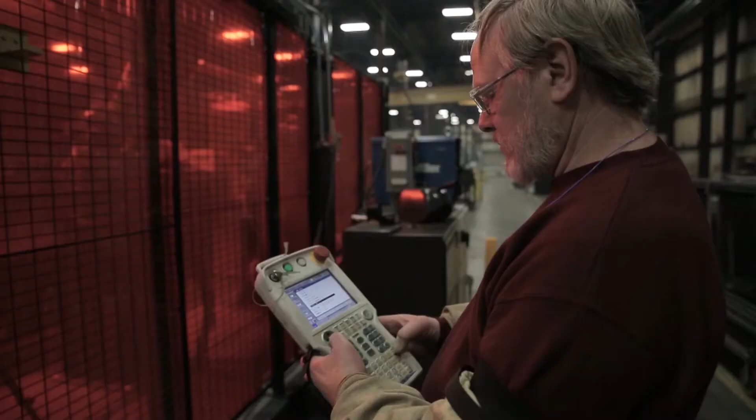It's called Spacesaver, a company with a long history of finding unique ways for people and businesses to store their stuff. It was an idea that started small, but rapidly grew to fill a global space. Spacesaver was founded in 1972, and we actually started in a barn with a 7-person team. At that time, the company was small, and we focused only on high-density mobile storage and shelving. It was about maximizing space in a given cube. Today, we've grown to a company with over 400 employees, a 300,000 square foot manufacturing facility that offers customized solutions all over the world.

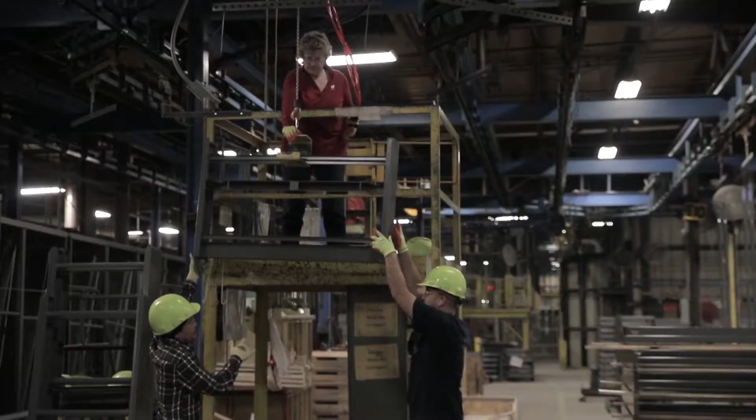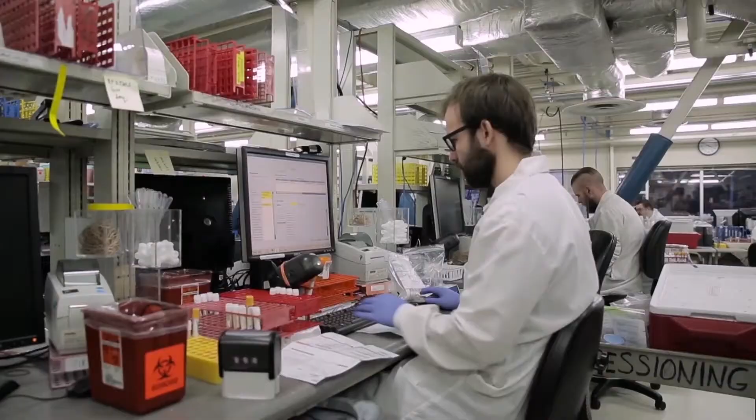And if you think these storage solutions are just for paper and files, you're wrong. Spacesaver is helping institutions large and small conquer some of their most complex storage issues, storing every kind of stuff imaginable. We solve storage problems in the military, public safety, healthcare, weapons racks, personal duty lockers, athletic storage. Whatever our customer's problem is, we can help them by utilizing our unique customized storage solutions. It means designing and manufacturing storage solutions to not only protect valuable items and save space, but also help companies worldwide get organized and work more efficiently.

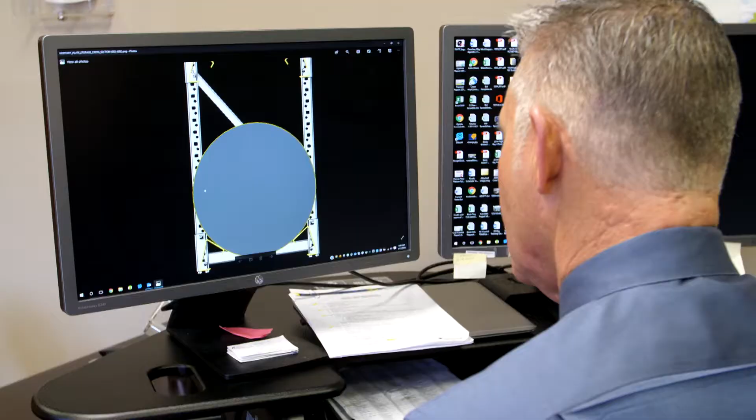At Spacesaver, this is all done from its original location in Fort Atkinson, with its own on-site engineering and manufacturing teams who design and manufacture all of its products in-house. Hi, my name is Matt Archer. I'm a product engineer here at Spacesaver, and this is where our engineering and sales teams create storage solutions. Welcome to our office.

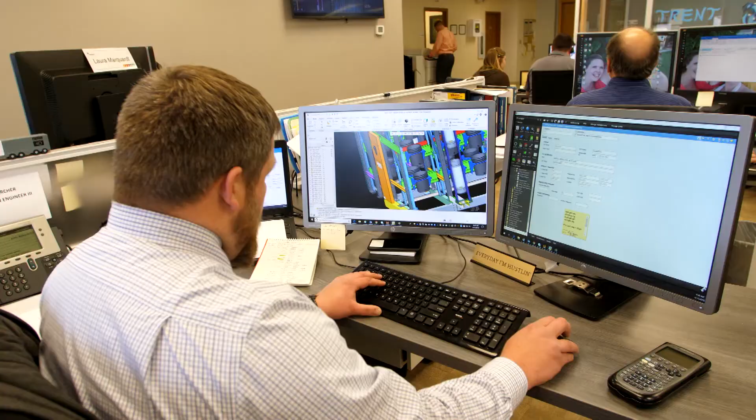It changes every day. Everything from buffalo hides and tomahawk missiles to computer chips and microscope slides. We collaborate here to provide our customers with the best product and a range of options that would best suit their needs.

Hi, I'm Mike Kling, General Manager of Manufacturing at Spacesaver. Welcome to the plant where those designs come to life.

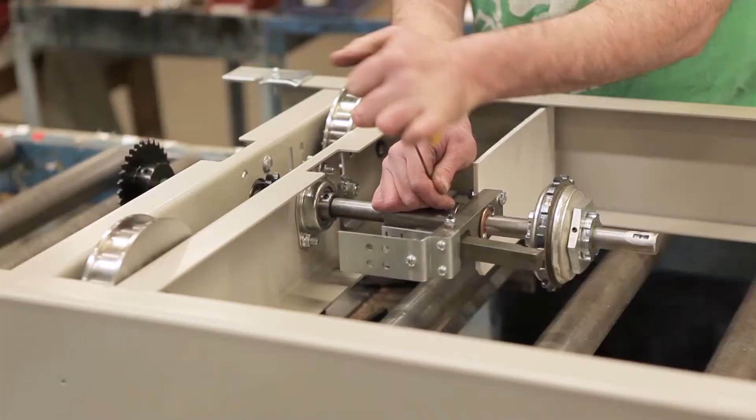Our factory is very state-of-the-art. We've got some of the latest technology available, which really helps us collaborate with our design engineers. Whatever they design, we can generally manufacture. Well, the technology blows me away. We have lasers, panel benders, automatic tool changers, and I just look at that and say, what's next?

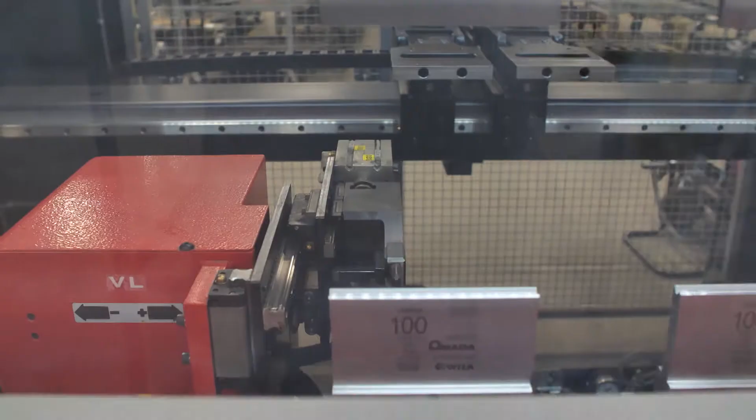Well, this machine back here is an automatic tool change press brake. It used to take about 45 minutes to an hour to change tooling on our old machines. This machine is about 1.5 to 2 minutes.

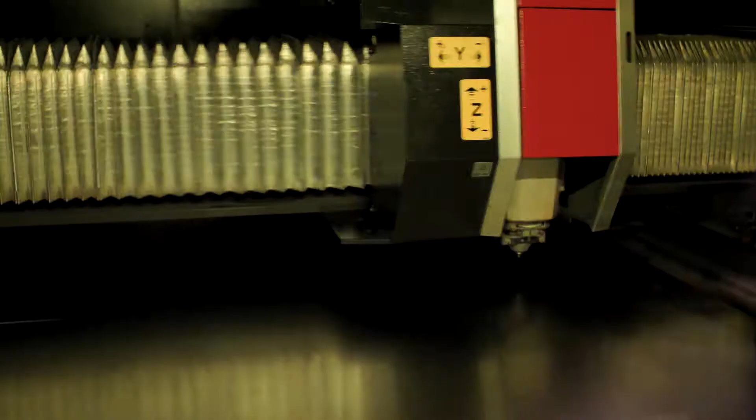That's our fiber laser cutting machine. What's exciting about that is the cost, the speed, and the flexibility of it. Compared to a previous laser which cut at 200 inches per minute, this one cuts at 1,100 inches per minute. To solve a customer's problem, we can go right from CAD geometry to cutting a part in a matter of minutes.

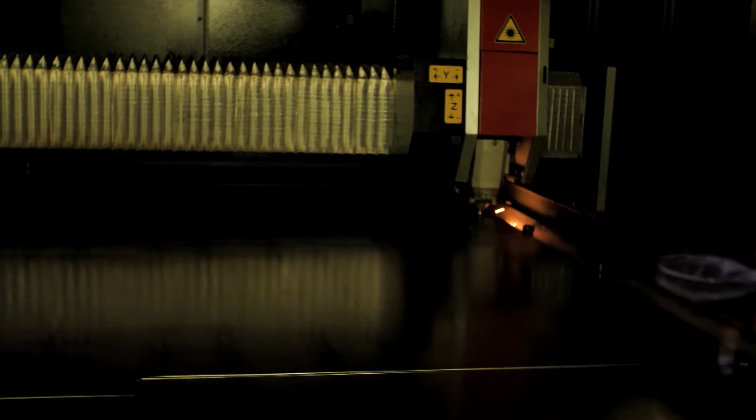This is a robotic MIG welder. What excites me about this is the speed and flexibility it gives us, and its cost competitive advantage. It welds at about twice the speed of a human being. And also the new kinetic teaching method for programming it is super simple.

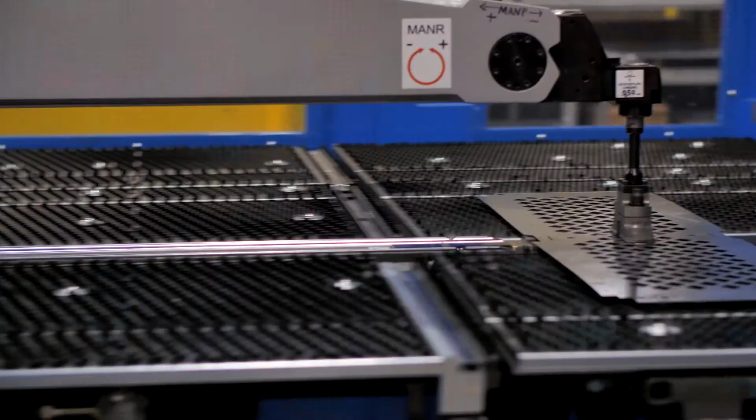This is our panel bender. What's exciting about this is it impacts safety, quality, and cost. It's so fast, it's twice as fast as a previous operation where it took 2 minutes in the past, this will take 1 minute. The parts we're actually making right now are doors for military weapon racks.

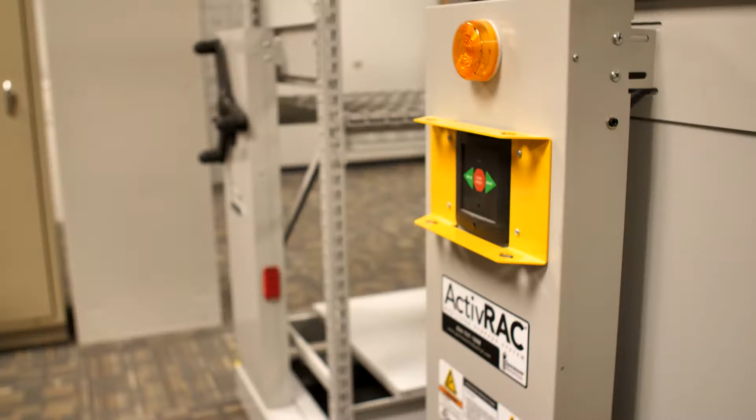The final engineered space-saving systems can be found in thousands of institutions across the country and around the globe, from storing athletic equipment for the Oregon Ducks to storing mountains of books for the DC Public Library.

Thanks to a network of local distributors who are experts at being solution providers. It's different every day, so we're learning more and more that we probably need to get face-to-face with the customer to understand completely what the problem is, and that gives us the best ability to come up with a solid solution.

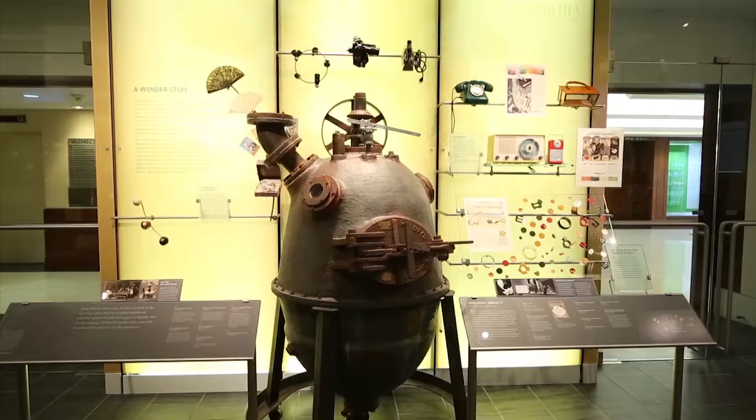Solutions such as this one, engineered for the Chemical Heritage Foundation in Philadelphia. The museum needed to relocate its entire research collection for convenient retrieval, for which Spacesaver designed the most creative use of vertical space.

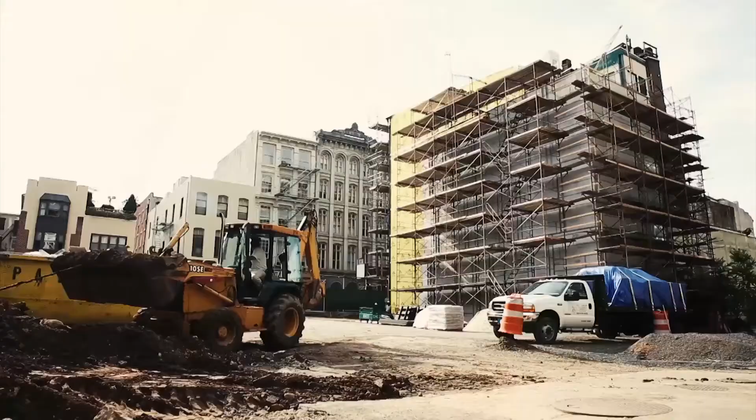The Heritage Foundation purchased a historic building and renovated it for the community and also to house their valuable collection. Our challenge was that this building was only 16 feet wide, and how do we accommodate the storage of 8,000 archive boxes in a space that small?

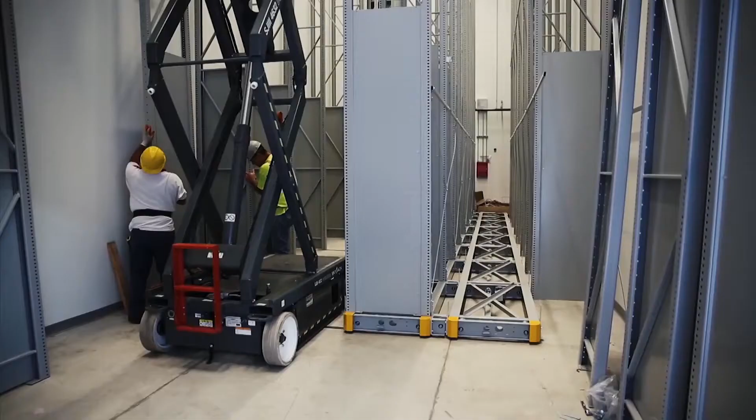We initially looked at putting shelving on all 4 floors of that building, but ultimately decided to go vertical with our storage solution by removing those 4 floors and installing our mobile high bay shelving, which goes up 36 feet tall. In the end, we were able to accommodate 1.5 miles of shelving in that building that was only 16 feet wide.

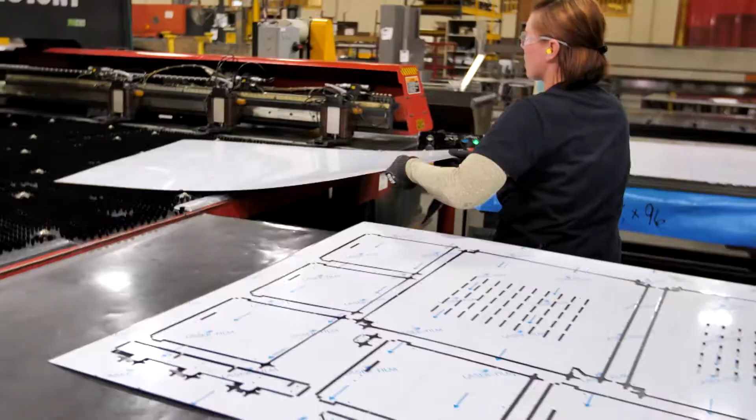For nearly half a century, the mission of Spacesaver has remained the same: creating storage systems that save space, increase productivity, and decrease energy consumption. At Spacesaver, there's no better time than now to make space matter.

Every day is a different day. Every project is different. Every storage solution is different. That's what makes it fun, and it's only going to get better and bigger.

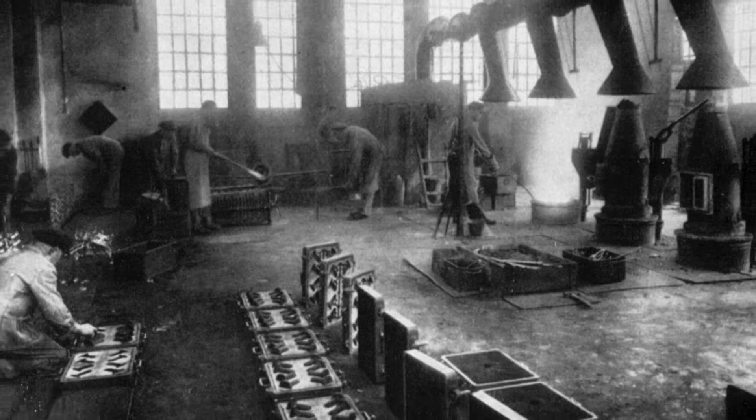The company started in Germany in 1899 and started making brass beer taps. Shortly after that, they entered the German plumbing market, the residential plumbing market, with products. Not long after that, they really became the leader in the European plumbing market with the products they supplied.

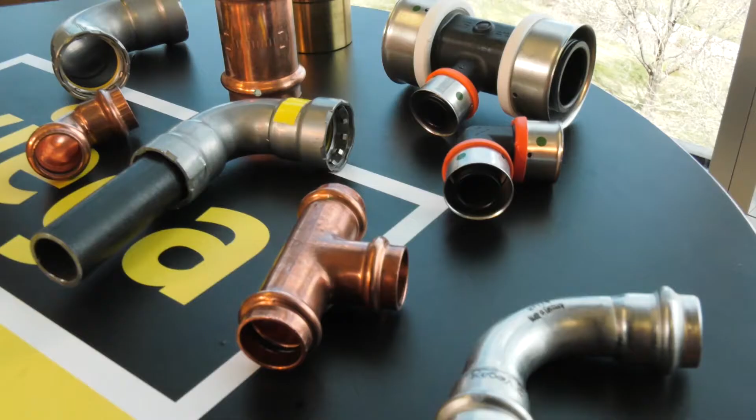We first came here in '99 pioneering a fitting system called ProPress. This was actually pioneered in Germany first by Viega. They developed it for the German market and then brought it here to the United States in '99, and it revolutionized the way we join pipe.

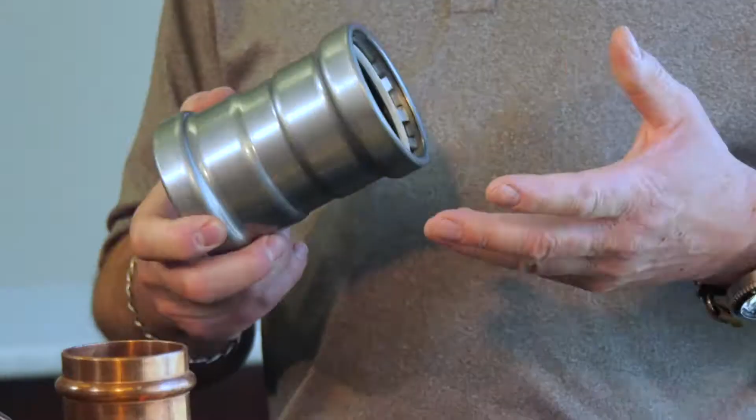We recently launched another product called MegaPress Stainless, which is also revolutionizing the industry because there hasn't been a press connect system developed yet for stainless pipe. And then our most recent innovation was a steel piping system called MegaPress XL, XL for big, goes up to 4-inch. No one's done this yet, but Viega has.

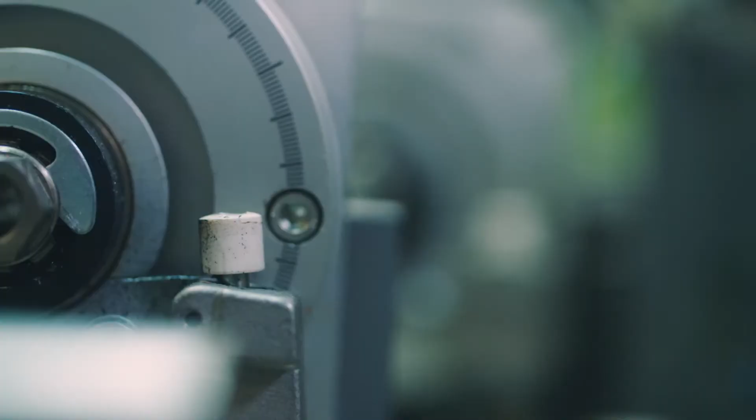The core function of Viega is to provide high quality products and at a high rate of service to our customers. Everything that we do every day revolves around taking care of our customers. And one of the things that we do, we're very innovative. We bring products to the market before people even realize that they need them.

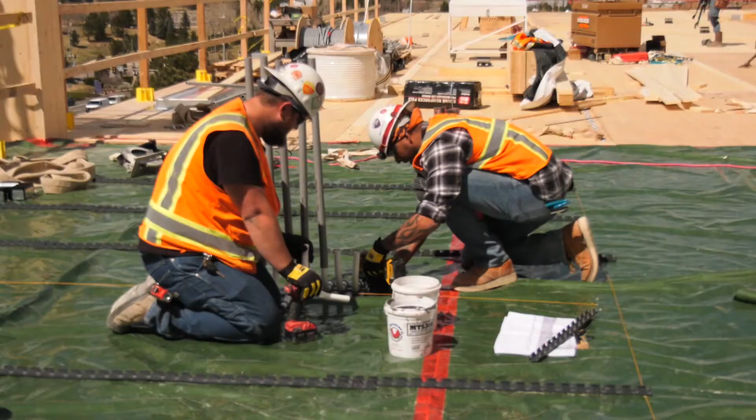The source of Viega's success is partly due to the willingness of this family-owned company to endlessly invest back into the company. One shining example: their new U.S. headquarters and Viega Training Center. We're moving into our Broomfield facility, into our new headquarters in November of this year. We're in the process now of building the new headquarters building and a training center on the same campus.

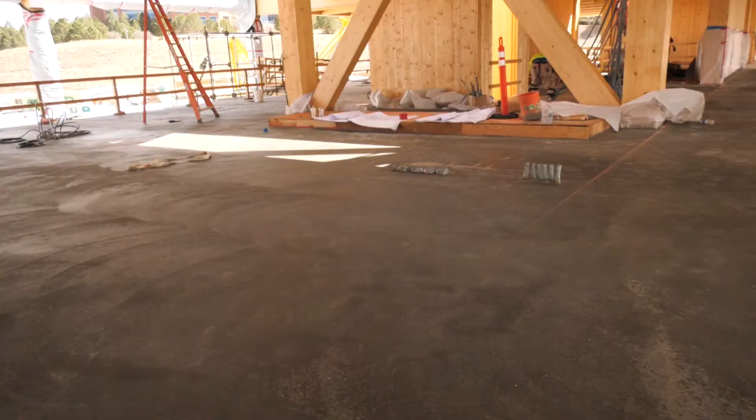In addition to all of the metallic piping systems, our buildings are heated and cooled with what we call radiant panels, or they're cooled by the flooring systems. We have concrete on the floor that heats the building in the winter and cools the building in the summer. So in order to do that, we have to embed pipe in the concrete. We use a product that we manufacture here in the United States called PEX, which stands for cross-linked polyethylene. It's just a tubing system that is designed to be used in heating and cooling systems, and we manufacture all of it right here in the United States.

This is the preliminary part of the radiant floor installation. We're standing on top of our concrete floor. It's still a little green, you can see it's still curing. They just poured this to cover up the tubing that's already embedded in the slab. There'll be a wall here at some point, and that tubing will run in the wall and go up to some distribution piping. So they're ready to run that in the framed wall when it's constructed.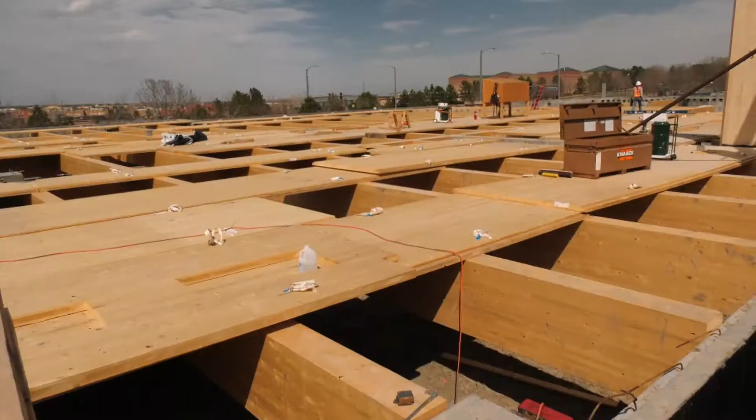When an employee arrives in the new headquarters building, they're going to arrive in a brand new, very classy building. It's actually being built with timber instead of traditional steel construction. We wanted to incorporate some of that Colorado feel in the office, allowing everybody to have the views that you would get by working here in Broomfield, Colorado.

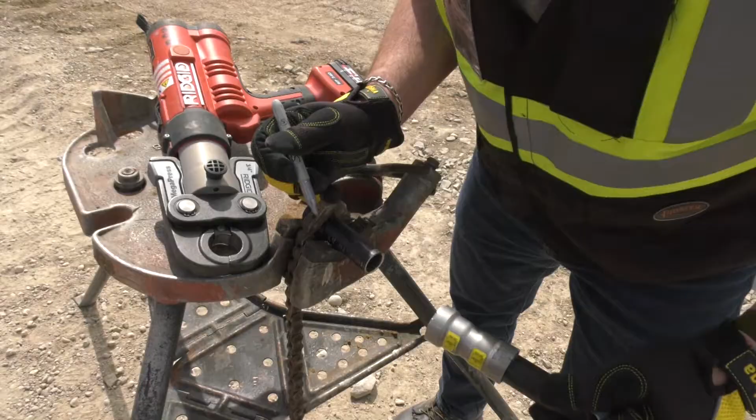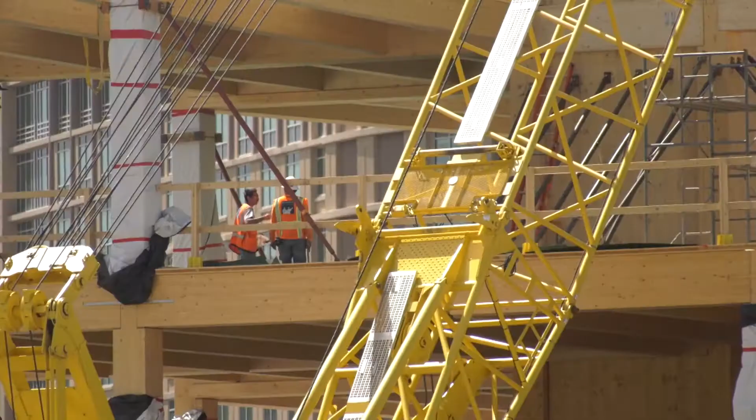Developing products and services that are consistent in quality is equally as important as connecting Viega to the industry. Training at Viega is very important. It's very important that our customers know our products and how we go to market. We train at every level, whether it's the wholesaler, the contractor that installs our products, or an architect and engineer. We even call in code officials on occasion to be trained on our products so they know when they go to a job site and inspect, they know what they're looking at and what to look for.

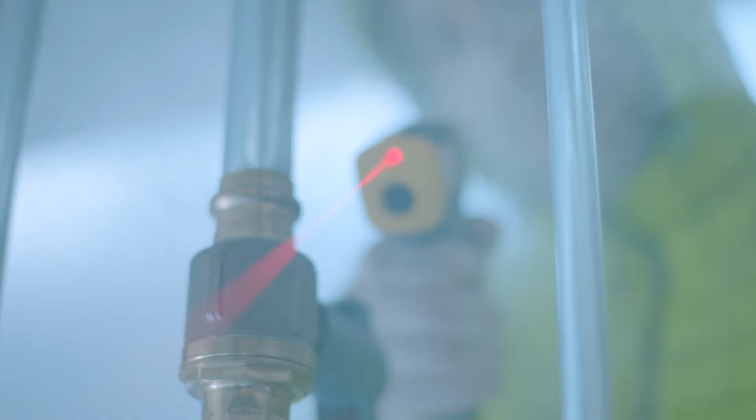Viega's vision has always been about revolutionizing installation by providing valuable drinking water, gas and heating installation with high-grade materials while always ensuring quality. Our products make 21st century civilization possible.

Viega has solved a lot of problems because of the technology by which our products are installed. Your traditional methods of connecting pipes are welding, brazing, soldering, which involve labor and people having a certain level of skill. It also takes a lot of time to connect pipes through those traditional technologies.

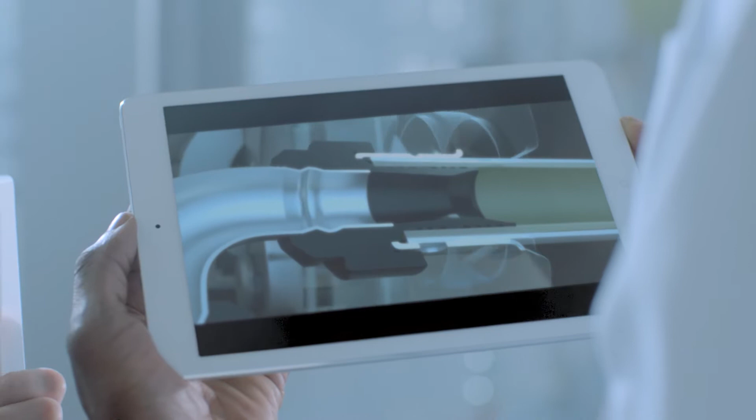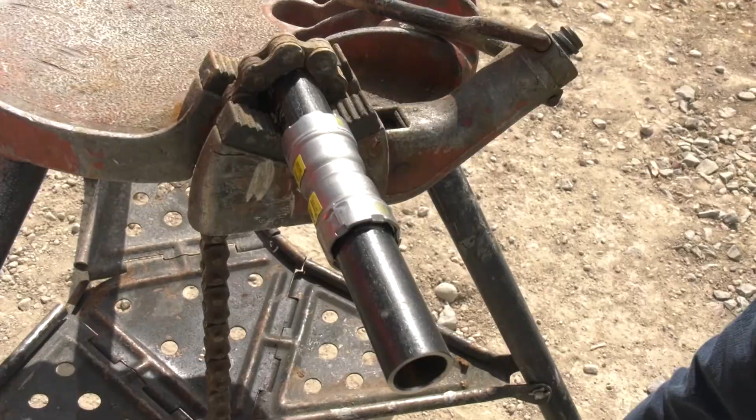The future of Viega is a real growth story, and I like to think that we're just getting started.

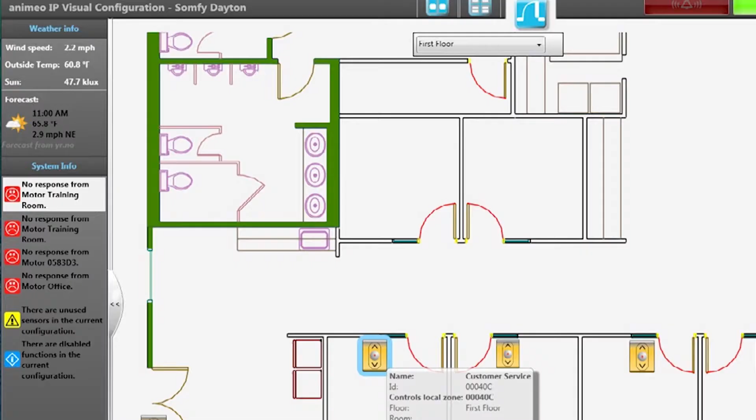Lu-Tek retrofits existing shades to become motorized using Somfy software. This is the Somfy animeo interface, where we put the floor plan of the building in, along with the latitude, longitude, and orientation of the building.

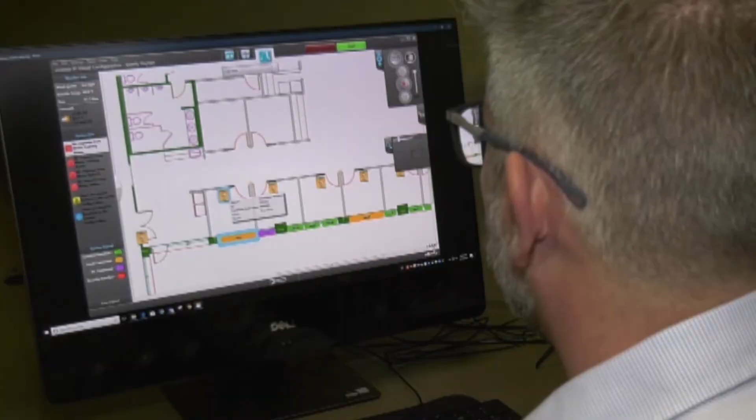With that, we can write rules so shades operate autonomously based on real-time weather. On the interface, I can go to different shades in the floor plan and operate them, giving me the ability to override the system for more or less light in the room. I can also use a smartphone from a different office or conference room to do that.

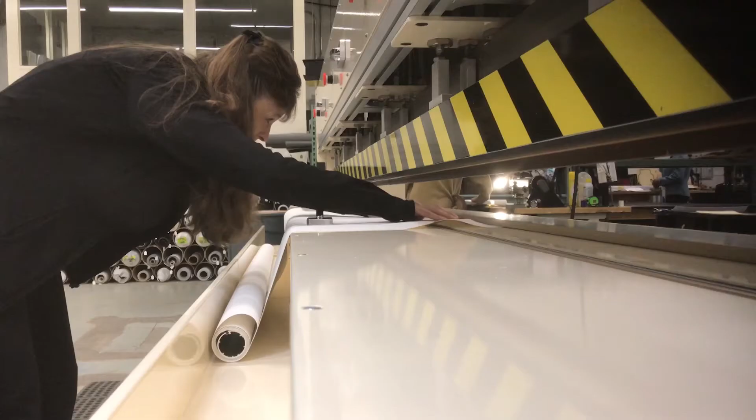Lu-Tek may be one of today's leaders in shade motorization and automation, but this window covering empire came from humble beginnings. Mary Lou Ralston is the founder of Lu-Tek.

Lu-Tek's been around since 1968. I was pregnant with my second child and thought, work is over at the telephone company, so I have to come up with something new, and I was a seamstress. When word got out that I was fabricating draperies, I had lots of new friends and relatives, and everybody wanted a little something to do with window coverings, draperies, throw pillows, shades, and those kinds of things. It just quickly started growing into something that I needed more space for. As they say, the rest is history.

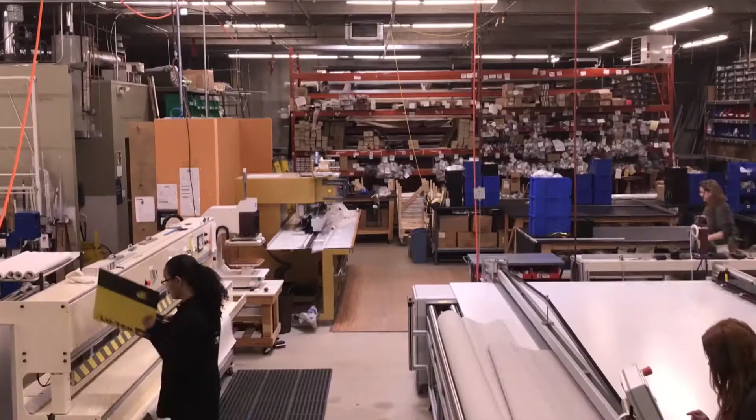Lu-Tek prides itself on the customization and professionalism of its staff. Let's take a look at how a custom shade is made.

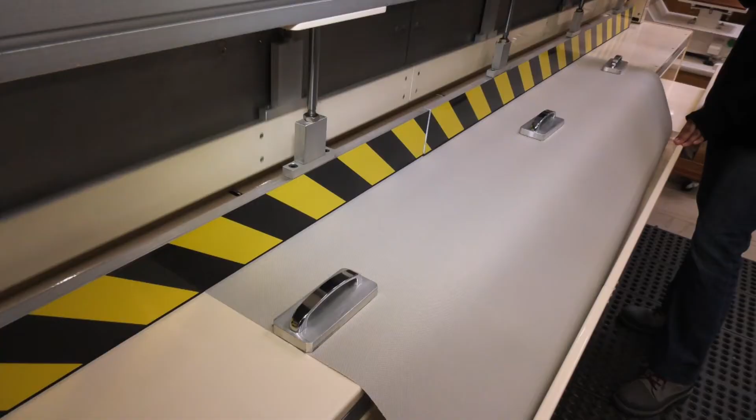Here we are at Lu-Tek scheduling. We roll in here, the jobs come in, they get scheduled, and then they feed through the rest of the manufacturing warehouse. What's happening right now is Christy, our trusty table cutter, maneuvering the fabric left to right to make the final cuts.

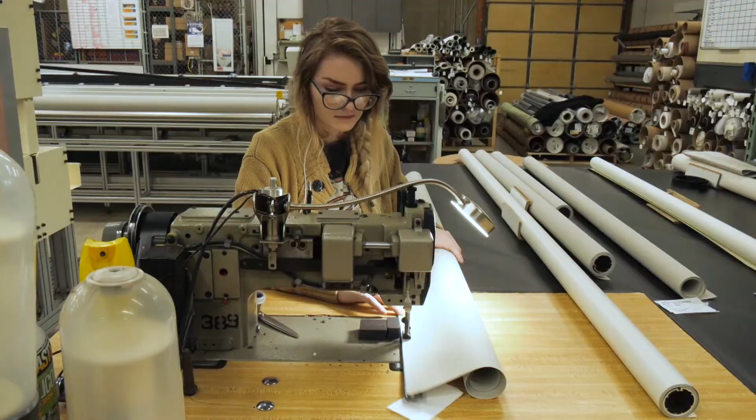After the fabric gets cut, it comes over here to have spline put on it. We sew our spline here at Lu-Tek because we come from sewing, so it's easier for us and the installation team as well. Step number three is welding.

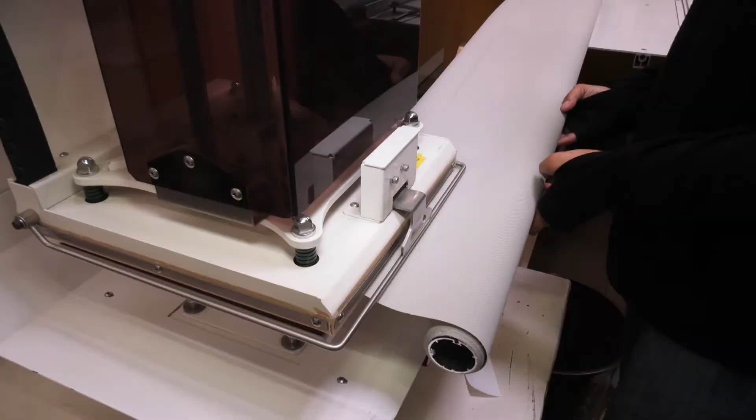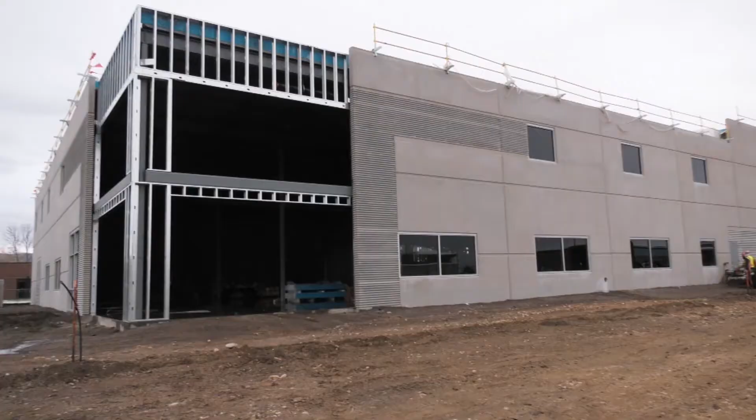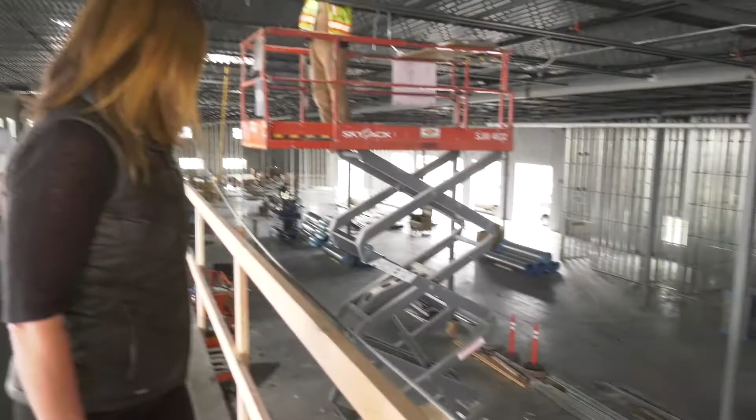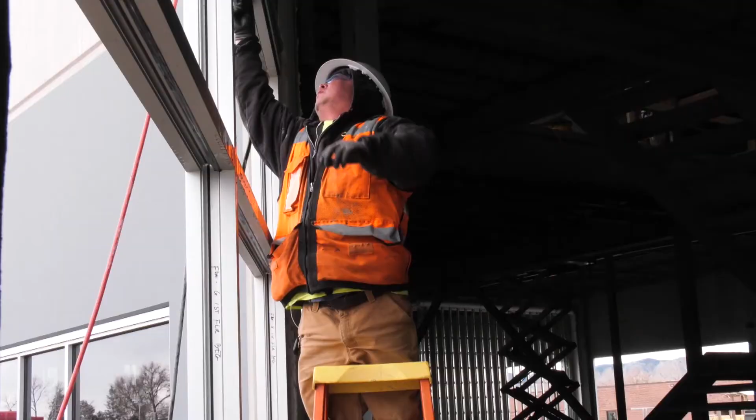In order to keep up with the demand of this booming city and beyond, Lu-Tek is building its new world headquarters a few miles away. Here is an overlooking view of all the manufacturing and assembly. This will all be open windows so we can watch the product coming off the line, and you can watch your job as it gets manufactured. It's pretty exciting, and you can bet the views from these windows will get the best treatments too.

What I love about Lu-Tek is their ability to think big, go far, and really bring the execution expertise so that it installs with perfection.

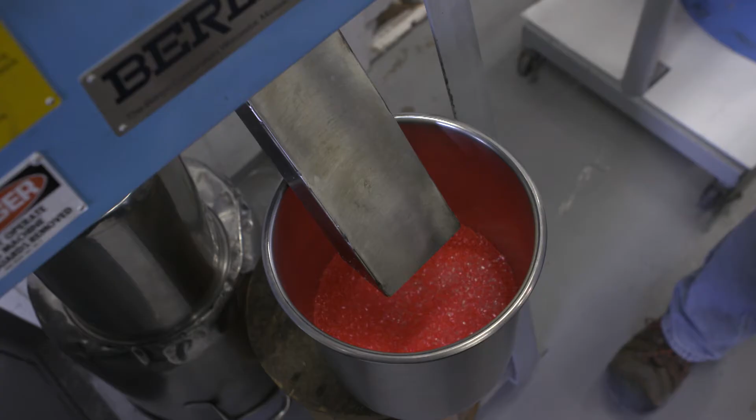What could be round, flat, colorful, light, bright, creative, and brilliant? Ask our friends working at Acrylite, and they would respond: anything acrylic. On this episode of Inside the Blueprint, we're in Sanford, Maine, where we're taking a step inside a house of acrylic, where their standards aren't set until they innovate a little bit of everything for the something that your office space needs.

Welcome to the home of Acrylite, where we turn customer needs into product and application solutions for the office environment. What is Acrylite? It's a trade name for our acrylic sheet, manufactured here in Sanford, Maine. It's used in a wide variety of applications, including office spaces for light fixtures, shelving, and office dividers. There are also marker boards and digital print products for high-end photography and artwork.

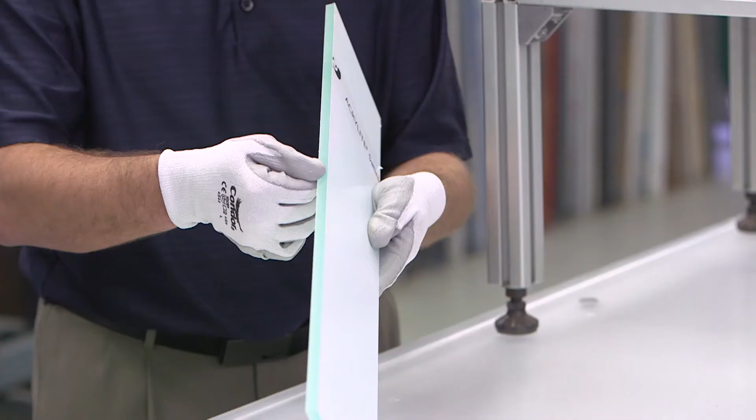Acrylic sheet is a clear, light transmitting plastic that has 10 times the break strength of glass, but only half the weight. Acrylic is known for its high clarity and superior weatherability. It's the best weathering plastic on the market. It doesn't yellow; we have a 30-year warranty against yellowing for our products, so you know they're going to last a long time. Put them in an office environment, and they're there forever.

They're going to look as beautiful as the day they were manufactured. In the office environment, acrylic has the ability to transmit light, the ability to add texture, and it adds color to give you a new, contemporary, and brilliant look.

Acrylite is shaping the future, and it's happening right here in the Technical Center. This is where we develop all of our new products for the acrylic sheets. We develop digital print sheets, sheets that diffuse LEDs so you don't have hot spots but allow good light transmission, new colors, new textures, and impact modified sheets.

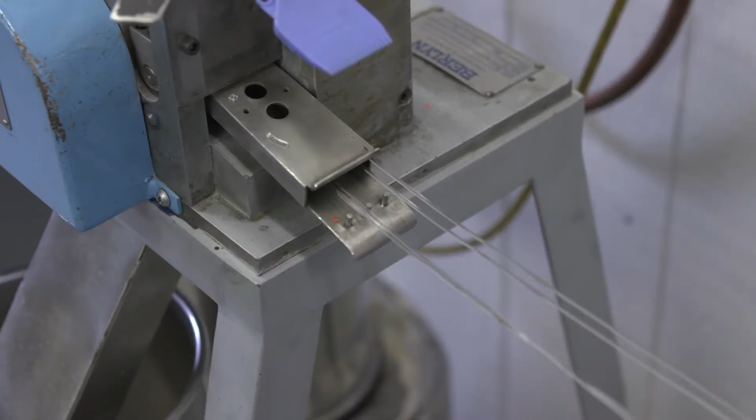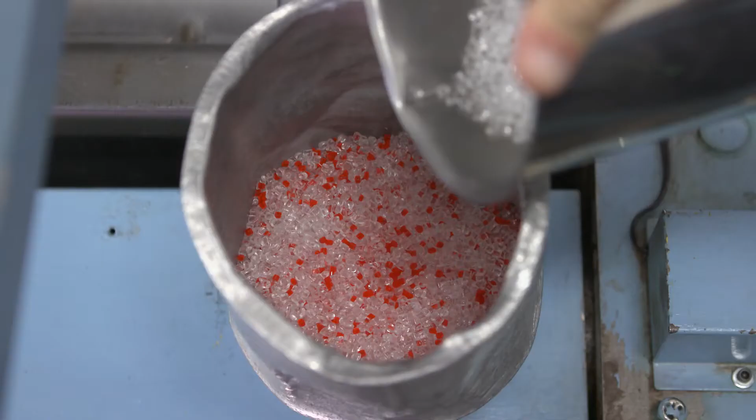Acrylic starts out as polymethyl methacrylate, in a resin or pellet form. That resin or pellet is heated up in an extruder, which melts and mixes any colorants added into the manufacturing process. When the hot molten polymer exits the extruder, it goes into a die, which spreads out the acrylic and helps determine the thickness of the sheet.

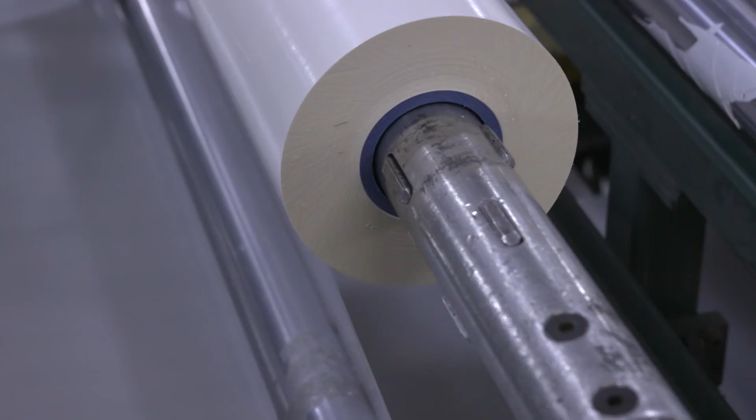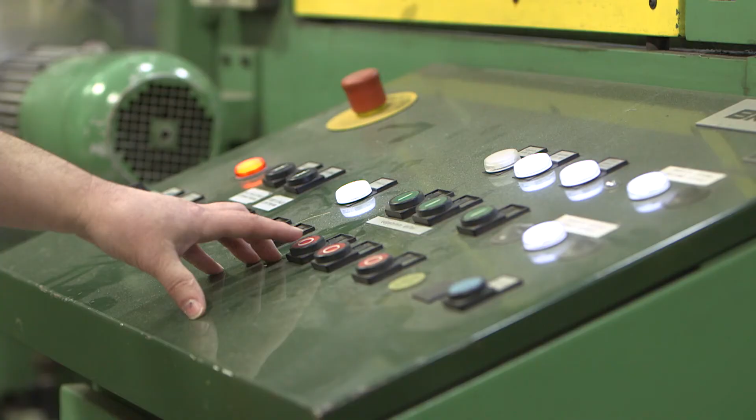When the molten acrylic comes out of the die, it's nearly 500 degrees Fahrenheit. As it continues its transformation process, it passes through a series of rollers to determine the thickness of the sheet. As the sheet comes off the rollers, it moves down the manufacturing line. You'll see it's wavy at the beginning, and then as it goes over a series of cooling rollers, it begins to flatten.

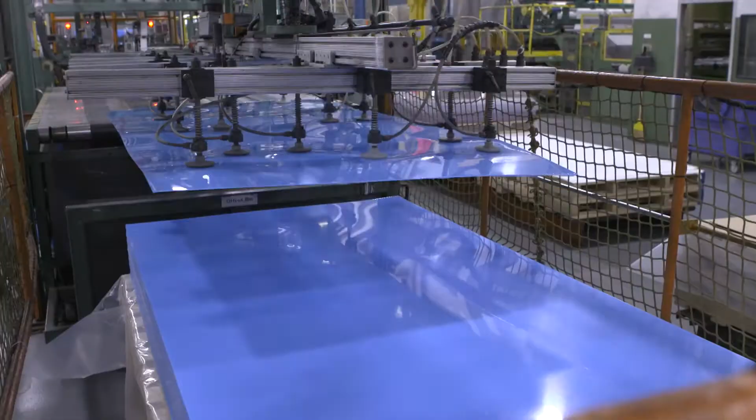As the material moves further down the line, we have a series of saws that will trim the edges and cut the sheet to length, typically a 4x8 sheet. Then we have a sheet stacker which will stack good sheet onto a skid. The skid is then taken away and packaged, ready for shipment.

Open your mind to all the possibilities that can be achieved with the color and light transmission of acrylic. Let's talk about some of our many new innovative products.

One, Acrylite digital print is very popular for UV printing. We have a lot of artwork that we put into our office building to just bring that splash of color. These prints were made on a UV flatbed printer, which allows for high clarity of the image and bright brilliance of the colors.

Our Satinice products are made specifically for lighting applications, where the goal is to hide LEDs but maintain high light transmission and high light diffusion.

Let's talk about our mirror products. When you're navigating the hallways of complex buildings and you're having to turn corners, there's always a lot of value in having a mirror that shows you who's coming from the other direction.

One of my favorite new products is our Acrylite marker board. It surpasses the traditional fiberback marker board in both style and durability. The technology on the sheet allows for an abrasion and chemical resistant surface, which minimizes the ghosting effect you'd traditionally see if you're writing with a dry erase marker and, say, leave it on for a week and then try to erase it. You don't see that with our product.

The Indow window is a very interesting and unique product. It offers insulation, comfort, and sound control in the office environment.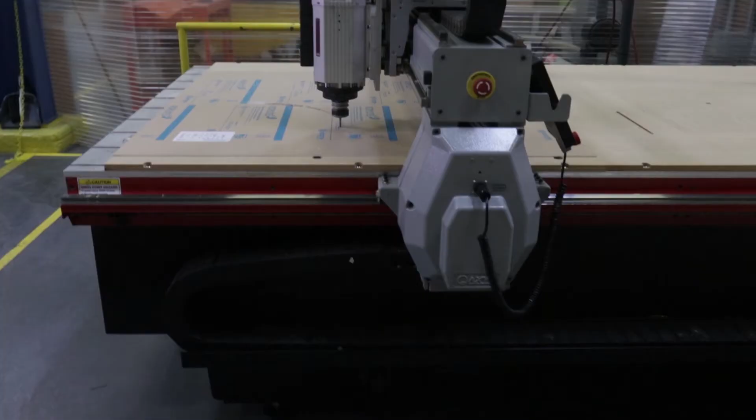It's time to try something new. Get rid of all the old stuff. Start with the new Acrylite materials. Spice up your life and relax in a new office environment with light transmission and light diffusion. Acrylite features superior benefits like unparalleled optical quality, high light transmission, and exceptional abrasion and chemical resistance. Enjoy going to work and have a place you can be proud of, with a lot of different, modern, and new innovative products.

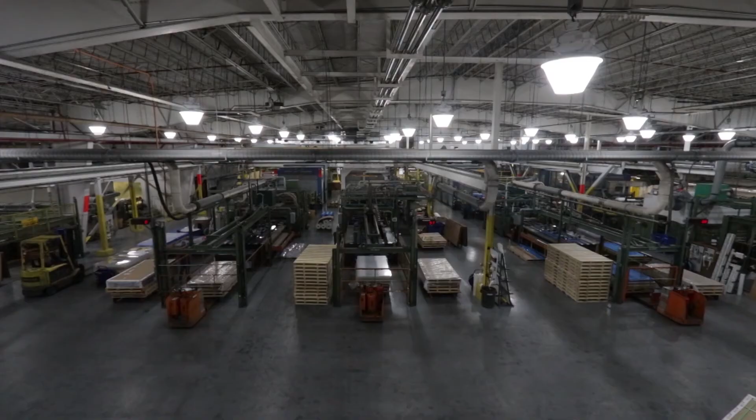This is the home of Acrylite. We're shaping the future of acrylic. We're shaping the future of your office. Let's do it together. Out with the old and in with the new shape of the future. Acrylite is an acrylic evolution created to inspire the next generation with infinite possibilities.